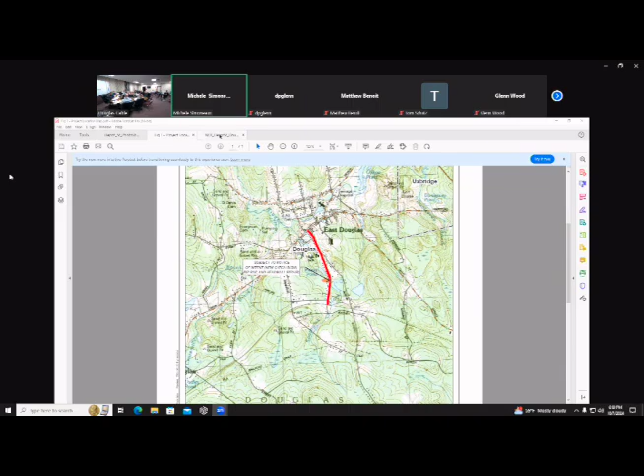Skipping over to some project plans - these are our notice of intent project plans that we presented to you. Without going into all the details of the exempt work, unless you have any specific questions, I'll dive into the subject of the notice of intent, which is the work here around 59 Depot Street. Let me zoom in a little bit for you. So here we have the roadway, and here is the river.

The various regulatory zones are here on the plan: the 50-foot and 100-foot buffer zones to the bank, the 100-foot riparian zone, and the 200-foot riverfront area from the mean annual high water line.

As we said, the majority of the work for the project will be in the roadway and therefore exempt. But there are a number of activities right around this location that we're going to be doing, which is the subject of this notice of intent.

Could you reference the plan sheet you're looking at? Yes, I'll give you the number here. C102. Thank you.

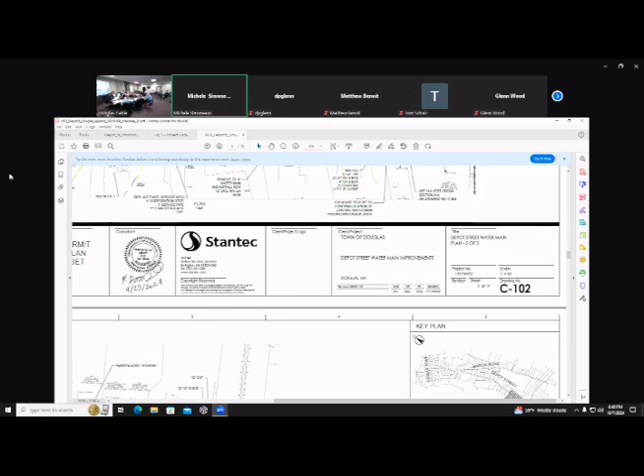Yes, so the majority of the work is right around here, around this stone wall, or headwall, excuse me, and then I want to show you some photos.

So here we are on Depot Street. The bulk of the work is going to be here at 59 Depot Street. This guardrail is right above the stone wall I described earlier. That's going to be replaced, and I'll show you why in a minute. When the project is done and this stone wall, the headwall, is replaced, we're going to be doing a guardrail up here and some stormwater management improvements, including a catch basin installed right in front of 59 Depot Street, with a 5x5 riprap area going down towards the river, which is in the riparian zone.

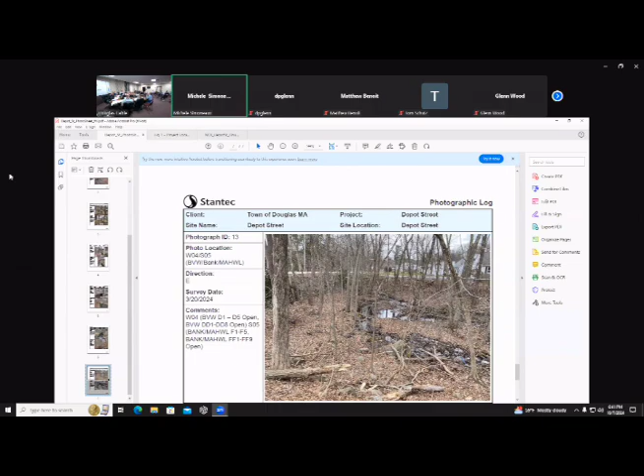Just to show you why: this stone wall, the headwall to the culvert, is in disrepair and needs to be repaired. So that's what's driving the work near the brook, coupled with the need for some stormwater management improvement.

I'll let my colleague Dave Glenn go into more detail about that later. But I just want to walk you through some of the plans for the stone wall here. Here's another shot of the road, the guardrail that will be replaced, and the top of the stone wall.

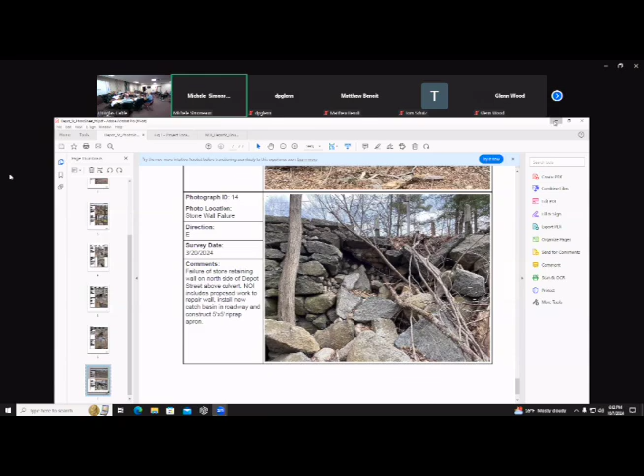Then I just want to page back to the plans here to show you some zoomed in details. I'm going to sheet, I believe this is 505.

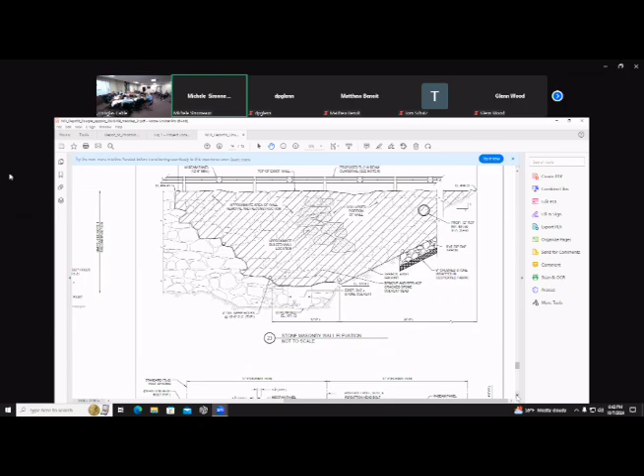So you said the entire wall is going to be replaced and not just repaired? No, it's going to be repaired, just the damaged section. The rest of the wall's in good shape. Okay, thank you. Who might you be, sir?

State your name and address. Bob and Eric. Bob and Eric, Economic Development. Thanks. Snuck in.

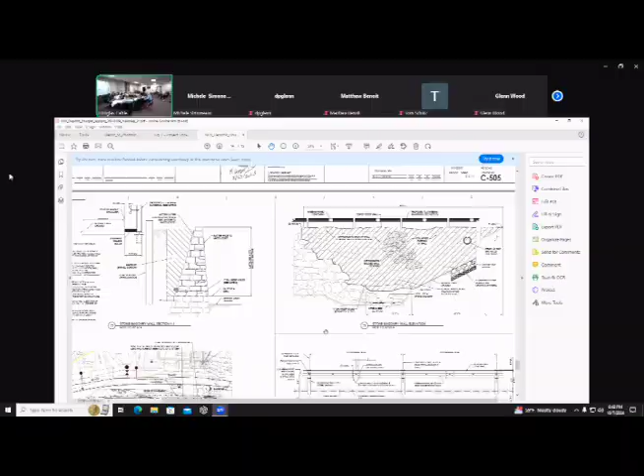So just, sorry, should I continue? I can't hear. Yes, continue, you can continue.

Okay, I appreciate that. So just to show a detail here of the stone masonry wall, what they're going to do is take the courses down to the top slab, repairing this wall because, as the picture showed, it's in disrepair, part of it is collapsed, so they'll repair it and reuse the existing blocks down below the wall towards the river.

As I mentioned, there will be some stormwater management improvements, which they'll go into in more detail, but there will be some weepholes placed along the wall to alleviate the stormwater.

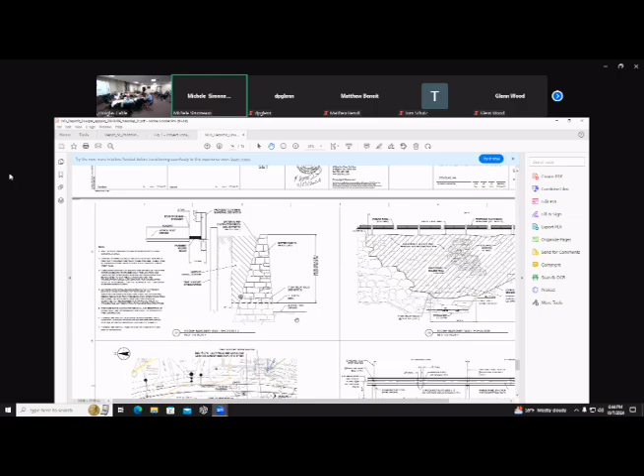Looking at this detail here, here's the stone wall itself. The idea is to support the project from the roadway, if at all possible. If that's not possible from the contractor's perspective, we built in a backup plan to potentially work with scaffolding across the river if need be, and to plan for that contingency.

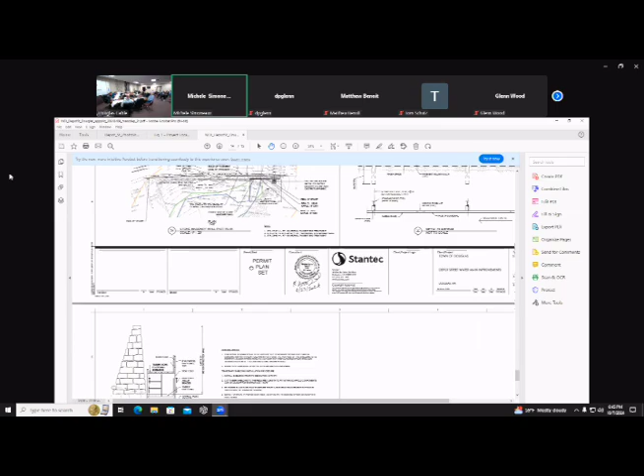We've got a detail of that here on this last page, a conceptual shielding work platform, in the event that the contractor has to get into the river and support the project from there. But otherwise, the hope is to do it from the roadway.

The trees that have to be cut, I mentioned in the beginning, and that's part of what's driving the riverfront area alteration. In order to do this work, there are a number of trees, mostly red maple, that have to come down. We have them detailed on the plans as to which tree, which species, with the DBHs, in order to make room for the contractor to do this work.

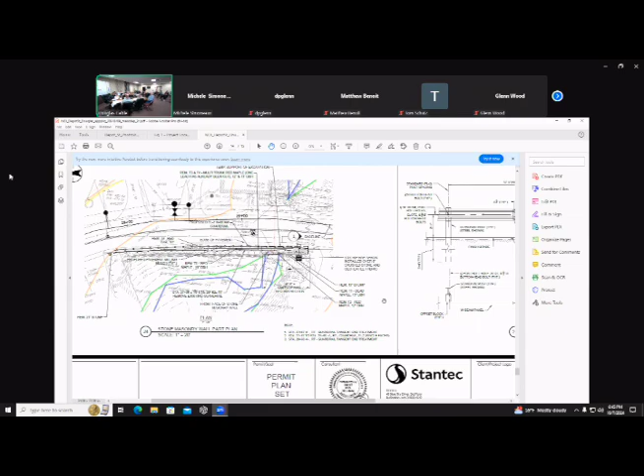And those are in the inner riparian zone. Are those trees below the retaining wall or on top? They are a combination. Most of them are on top of the retaining wall.

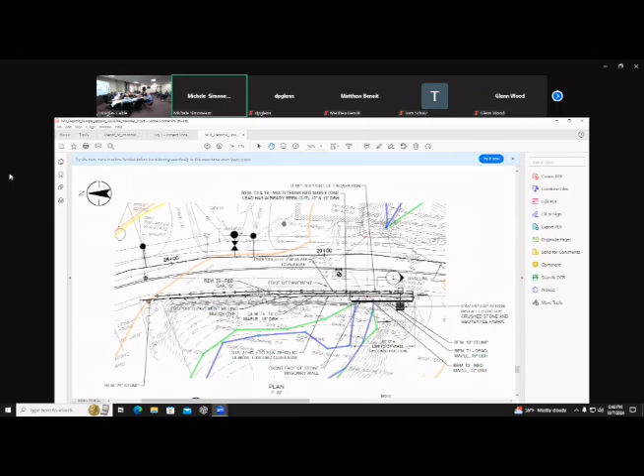Unless there are any other questions on that portion, I'll turn it over to Dave Glenn to describe the stormwater management improvements.

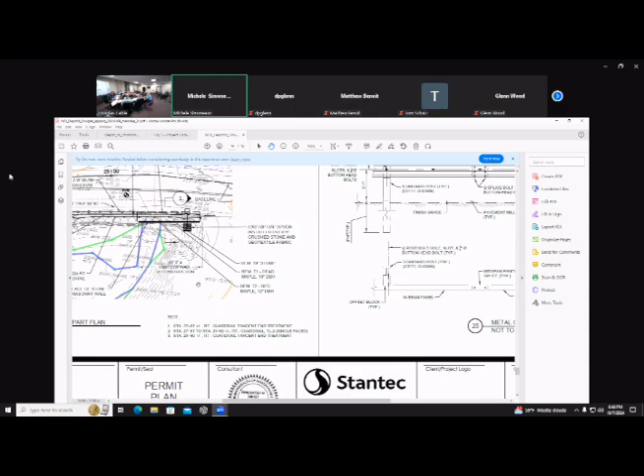Good evening, everyone. Dave Glenn from Stantec. I prepared the actual stormwater report for the project, and I'll go into a little detail on the stormwater improvements being proposed. Michelle, if you want to keep that graphic up, that's probably the best graphic to show the actual storm drainage improvements for the project.

As Michelle had said, the improvement is installing a deep sump hooded catch basin along the gutter line adjacent to 59 Depot Street and the stone retaining wall. The catch basin will provide some control of stormwater runoff in the area. Currently, the roadway in that area has no curb at all, and the water is sheet flowing off the curbless gutter, causing some erosion going towards the wetland system itself.

So the intent was to provide a catch basin in that area along with a berm to direct the water into the catch basin, and then outlet it through the pipe into a riprap apron at the toe of the slope. In addition to providing some water quality treatment, that will also control erosion, which is currently contributing at that area now, adjacent to house number 59.

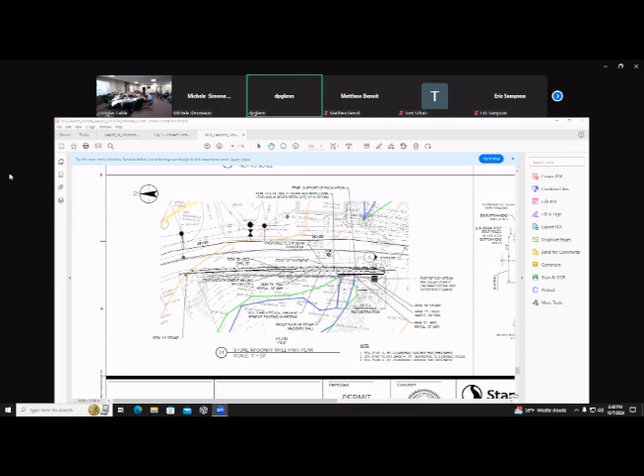Are there any drainage pipes that go into this new catch basin? No, it's just a single catch basin, because currently this whole area of roadway has no curb at all. We're looking to put in a bit of a berm along the back side of the catch basin to intercept flow from the roadway so it goes into the catch basin, as opposed to coming off the edge of pavement and causing erosion on the slope going down towards the wetland system. I think we had a picture of that—there's actually some erosion currently taking place in that area.

So it's just a single catch basin that's being provided.

Can you tell what caused the retaining wall failure? Was it water running over the top of the wall, or can you tell? I'm not a structural engineer, but from observations, I think the erosion has contributed to failure of the wall, in addition to having the tree located above the wall itself. I think the tree root system, as Michelle said, there's several trees along the top of that wall that have probably caused that to fail at this location. So I think it's a combination of things, but I would say the erosion potentially contributed to it, in addition to the existing trees along the top of the wall.

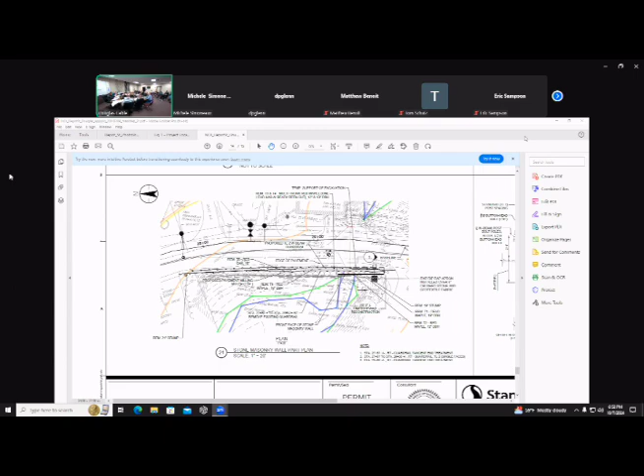And I just pulled a picture that we took when we were doing an inventory of the trees, so we could account for what had to come down since it's in the riverfront area. If you can see it okay, you can see at least a few of the trees that will have to come down. We're not seeing the pictures you're putting up. We're still looking at the plan on the screen. Did it pop up now? Nope, it's just the plan. Okay, interesting. The first time you did it, it did show up. All right, let me try again. Got a nice photo for you.

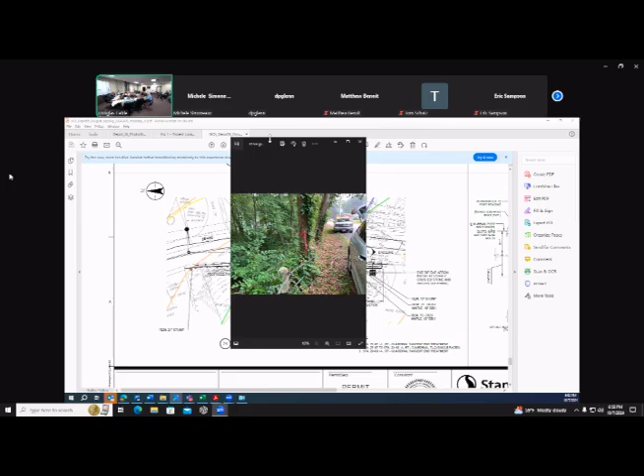While you're doing that, how far is the riprap apron from the water's edge or the wetland edge? I can't tell from this line what I'm looking at here. Is it a wetland or a bank? It is both. The green is a bordering vegetated wetland, just a little pocket of BVW. And this blue line represents a coincident inland bank and mean annual high water line, so it represents both. So it is in the inner riparian zone. It is not being proposed in the wetland, but it is a distance of approximately 50 feet.

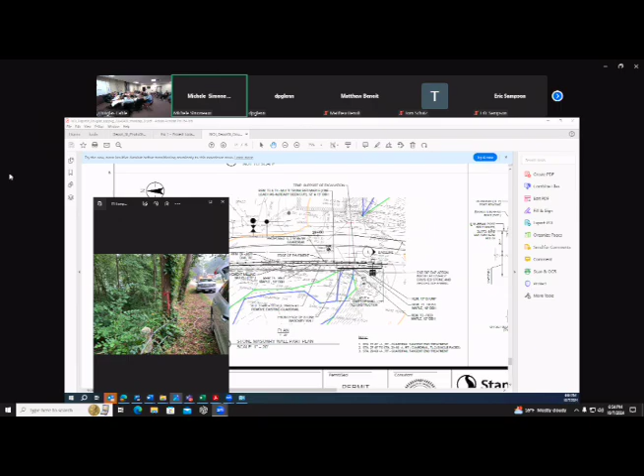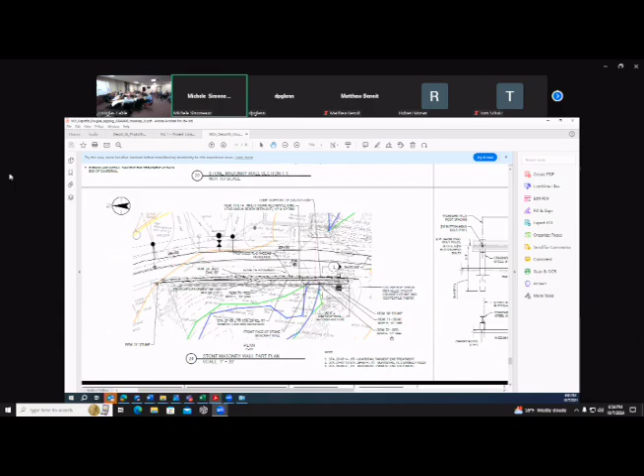You said 50 feet? Oh, sorry, no, the scale is different on this plan, apologies. I think it's more like 25 feet. 1 in 20, yeah. About 25 to 30 feet to the edge of the riprap associated with the stormwater improvements. Thank you. Yes. I can draw a line here. So to the mean annual high water line and bank would be about 25, 30 feet.

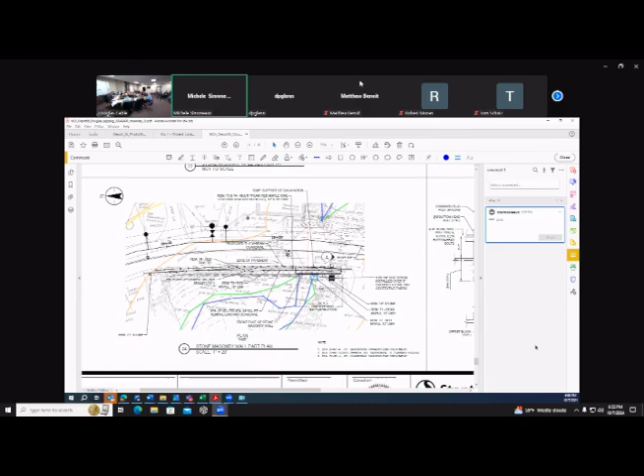That riprap is where all the stone is now? The stone from the wall? Oh, is it? Yeah, I went and measured it, it's about 75 to 80 square feet of stone that came down. So by taking that stone and putting it back into the wall, you'll kind of remediate back to the original wetland area. Mm-hmm. You know what I mean? Yep.

Is that everything? Oh, you got pictures to show us. Your pictures are up now. Yeah, we can see. So I was just confirming the trees that will need to come down, the red maples, and we do have measurements on those and an inventory of them included in the notice of intent. Okay. And the guardrail, did you tell us what type of guardrail it's going to be?

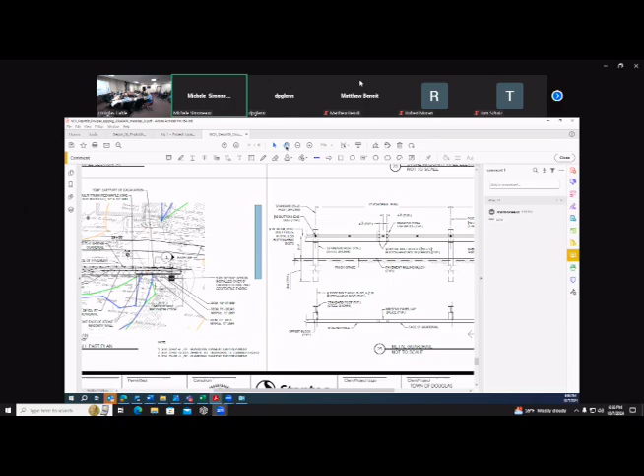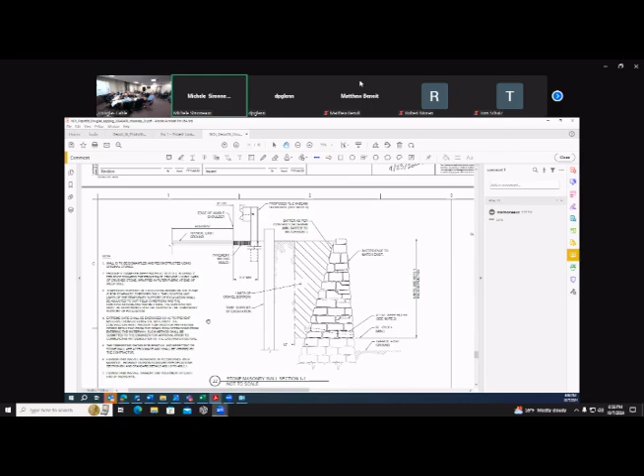Yes, let me show some detail. While I'm looking for the detail here, it's a modernized MassDOT approved type of guardrail, a TL-2 W-beam guardrail. It will be in accordance with MassDOT Highway Division standard specifications. Just a typical metal guardrail, replacing the concrete post and cable guardrail that's there now, which I just showed you.

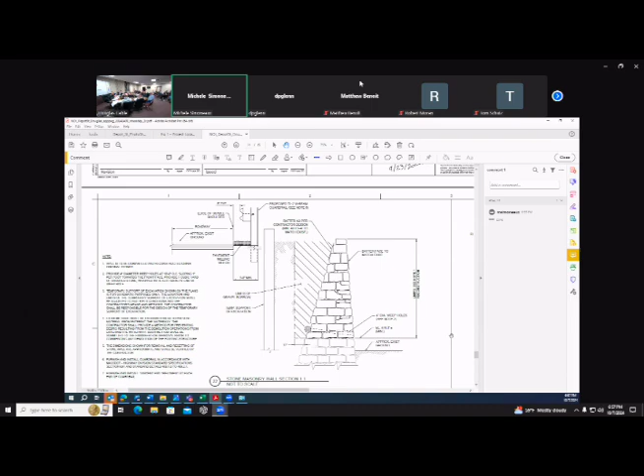And what is the color of the guardrail? Galvanized. Galvanized, great. Can it be brown? Because I've seen them brown in other projects. I'll defer to Bob on that one. I don't know, I haven't purchased brown guardrail, but I think I have seen them used. I'm almost positive. Yeah, I see them in parks, state parks. Right, exactly. It's more natural in that setting.

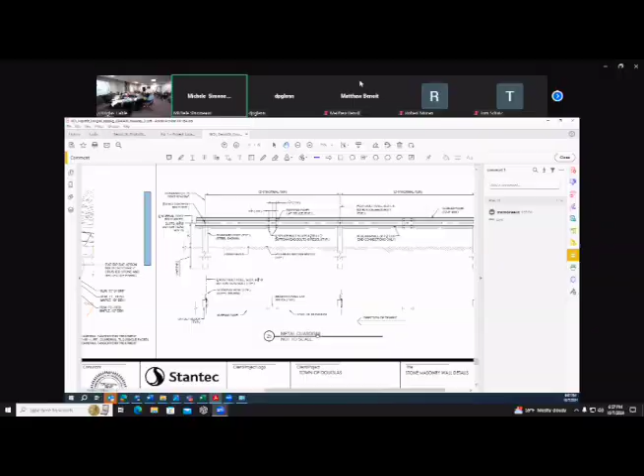Metal guardrail, found the detail finally. Okay. Brandon or Matt, do you have any thoughts on this proposal? Yeah, Mr. Chairman, I have a question. Okay.

This is a project within riverfront area, and they could not stay at least 100 feet away, but it's necessary for the work to happen within 100 feet. So this was filed as a riverfront area limited project, so I think it qualifies for that. As part of the disturbance, they're proposing to plant 12 mitigation trees off-site. So there's 6 trees to be felled, and there's really not room on site, and it's not even their property to begin with. So when you do redevelopment and you disturb the riverfront area, when you do off-site mitigation, the mitigation has to be a ratio of 2 to 1.

So they're proposing to replace 12 trees at the fire station at Cottage Street, which is next to what pond? Fire pond. Yeah, that's right. So I'd say that as long as the trees are within the buffer zone of the pond, and the narrative says it's going to be put in an area that's already like lawn, I think that's adequate mitigation for what's being done. Otherwise, I think the project meets performance standards for the other wetland resource areas.

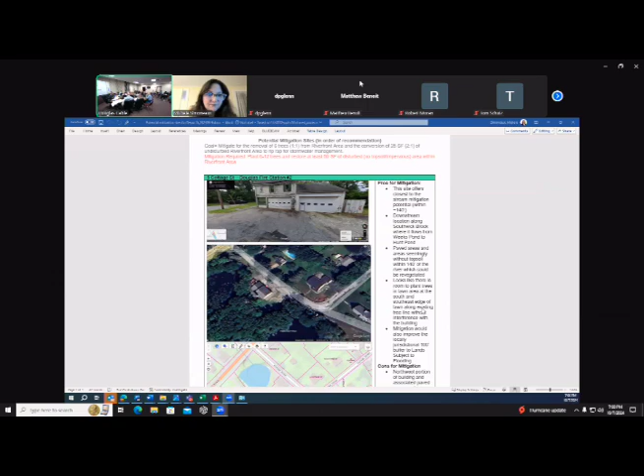And just as with North Street, my recommendations for special conditions, as I wait for Mr. Foran to catch up. I'm good. Okay. Is to include stormwater standard number 8, which is section 4.7 of the stormwater report as a condition, because it explains everything that needs to be explained, and also it references the stormwater pollution prevention plan, which is their guide for controlling erosion and sediment on site. And also to include section 4.8 of the stormwater report, which is stormwater standard number 9, operation and maintenance plan, which states how the stormwater BMPs will be taken care of long-term, and to make that an in perpetuity condition.

Thank you, Brandon. Is your thought to go to the left of the old fire station, or the right, or both? Do you really have a thought as to where the trees will really go? I don't know that we picked the actual spot yet, but we just know there's area there. Right. The narrative relies a lot on me, that the conservation agent will have some authority to pick the species and the location of where they go. Okay, so if you want to put that in as a condition? Yeah, why not? If you don't, then you have a little less control. Right.

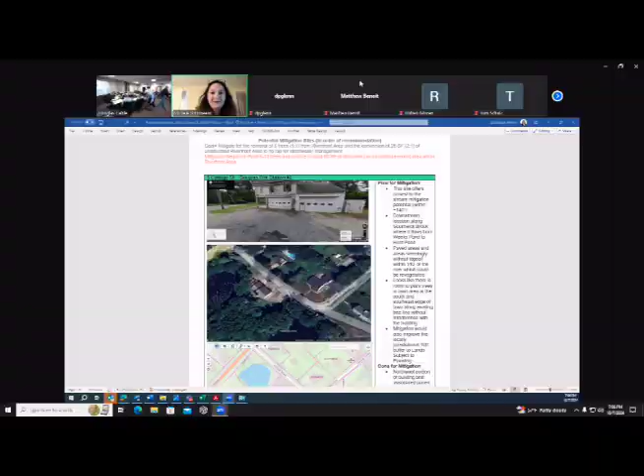All right, at this time, I would like to open the public hearing for... What day was it continued to? The 21st. Thank you. For Kyle and Crystal Genesee, 122 Walnut Street, single-family home, map 274, lot 7.2. I'm going to just read it. Haven't done that in a while. Okay.

The Town of Douglas Conservation Commission, 29 Depot Street, Douglas, Mass. 01516, pursuant to Mass General Laws, Chapter 131, Section 40 of the Massachusetts Wetlands Protection Act, the Town of Douglas Conservation Commission will hold a public hearing on October 7th at 7 p.m. for a notice of intent filed by Kyle and Crystal Genesee, located at 122 Walnut Street, for work to be done pursuant to the Town of Douglas Wetland Bylaw and the Wetland Protection Act, MGL 131, Section 40. The proposed work involves the replacement of an existing culvert, widening of an existing driveway, grading, and utilities.

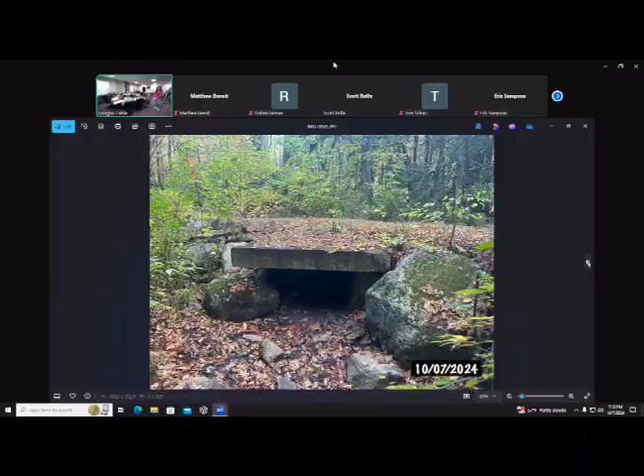Brandon, have you had a look at this? Yeah. I got a slideshow that I've been putting up while you're talking. Oh, and I haven't even noticed, sorry. That's okay. Can you run through it again? Yeah, sure, I can stop it. Oh, hold on. Okay, here's the existing

dirt cart path leading to the back of the property where the house will eventually be constructed. And when I review these kinds of projects, when it's just a driveway or just a road, I always look at, well, what's the end point? Are you even going to be able to do what you want to do beyond the crossing, the whole purpose of the crossing? Or is it just a waste of everybody's time and unnecessary destruction of the environment?

But the area where I'm guessing a house is going to be built, I checked it out, and it looks like there's plenty of upland that they could build it outside of jurisdiction. So I just want to point that out first. Okay, so here I am walking up the path, and now I'm at the crossing, which is right here. Okay.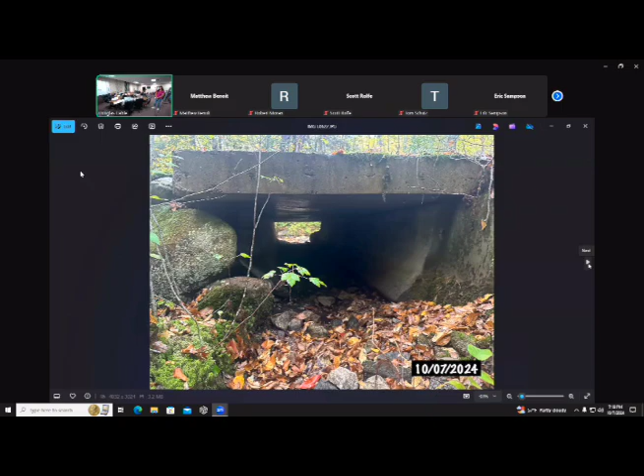And even though it's dead, it actually has as much, if not more, value than the live trees because it's great habitat for insects. Out in the middle of the woods, not a problem as opposed to right next to your house, because it provides a food source for the animals, and especially the birds, and it provides nesting habitat eventually for boring birds that would bore into it, squirrels and things like that.

So my request would be to try and save these, what I think are high-value trees, to try to work around the drip line of the root system. You don't have to work around the drip line of the dead one, because it doesn't really matter. But just attempt to preserve these 3 trees. If they live, great. If they die, then they just become a snag tree with wildlife habitat value, so no big loss. So that's what I think about it.

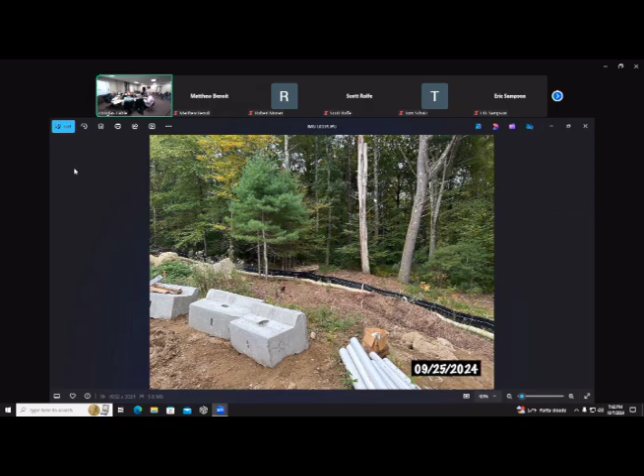Correct. So what's the proposal for those trees in terms of removal? Removing just the trees, cutting them, leaving the stumps? Yes, like for example, Mr. Chairman, in this picture, this one right here is one of them.

This was meant to highlight some of the trees, like this one right here. I think at least one, if not both, of these white pines, because the garage is being proposed right here. Here's a good one - this one shows some dead ash trees here and here. So these are the kinds of trees that are proposed to be taken down, and I don't have any issue with that.

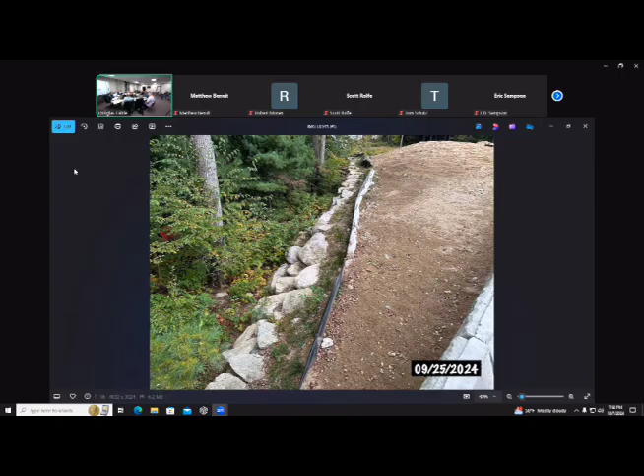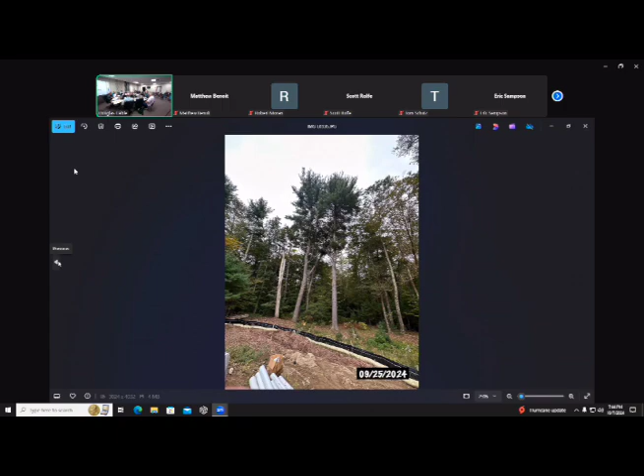I mean, those you said were pines? I don't see pines on here. The ash trees. Okay, go back to the picture that showed - yeah, so ash right here, yep, those are the ash. Ash right here. There's a picture before that where you... sure, those. Yeah, these two proposed to be taken down? No, just the dead one. It's the other one in the front that is a big white pine that's split. It grew like this - I don't know if I got a picture of that one.

Okey-doke. Yeah, but anyway, all the trees that I saw were either in the limit of disturbance already or very close to it and within striking distance of a structure, so we get a letter from a certified arborist - so what are you going to do? Exactly, what are you going to do? Okay. So that's the easy part.

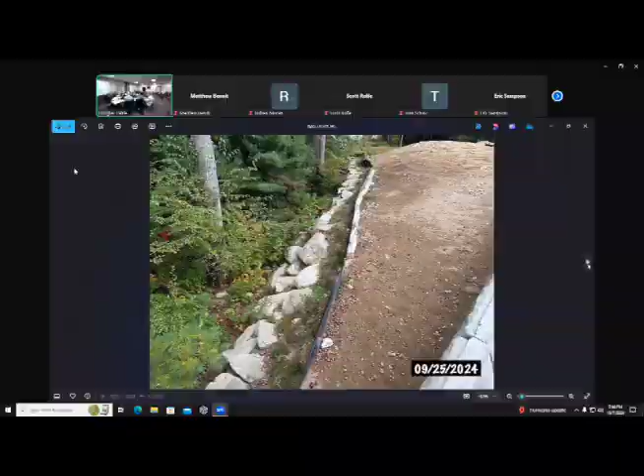And then the harder part - do you have any questions, Kate? Jim? Thank you, no, okay, thanks. The harder part is the boulder retaining wall that you brought up last time, Mr. Chairman, which is a picture of right here.

Now, this is loosely put together, kind of on the job, put together by the previous contractor, previous owner. That was not on the approved site plans from the 2021 order of conditions. It just appeared. The brick houses had nothing to do with that, but I couldn't ignore it. So the question is, let me step back.

As part of this exercise, I decided to do a georeferencing exercise with GIS software. And what I did is - come on, be helpful here. Here we go. So I'm going to go through this with you.

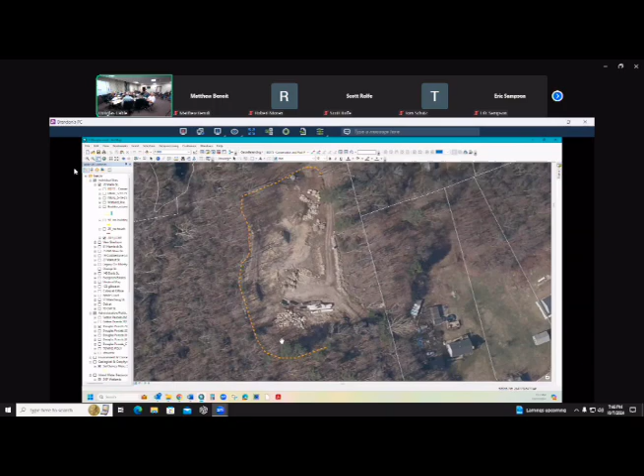There's all the boulders there. Well, it's all piled up. Well, on this side, you come in from here, right? All this is gone right over here now. All these boulders, they might still be there, but they're well within the limit of work. What wasn't there before is this row right here. Okay? All right, so...

Excuse how slow this program is, it's big and clunky. So what I did is I took the site plans and overlaid them using the property lines and wetland flags as control points. So this is the site plan from 2021.

And the area that we're concerned about is right over here. This is where that boulder retaining wall is now. And then what I did is I then geo-referenced the 2024 plan to go along with it. Give it a second. Here we go. So if you notice, the wetland lines, they line up perfectly.

All the flags, they line up perfectly. So I'd say that they're one for one as far as comparison. As far as the construction of everything goes, it's very close, if not right on, for the things that were proposed before, lining up with what's there now. Things that have been added include the sports court, and then we have this boulder retaining wall here.

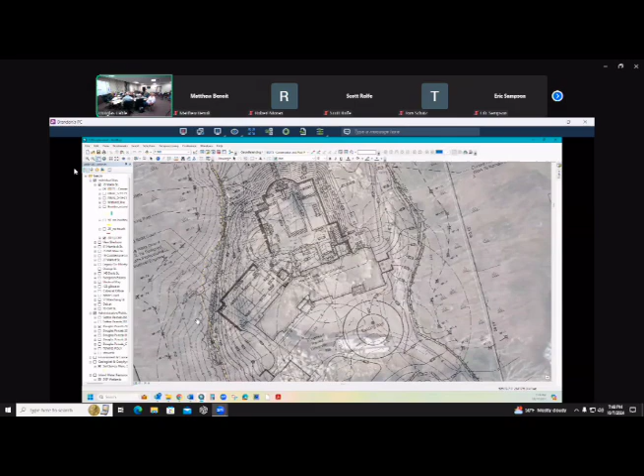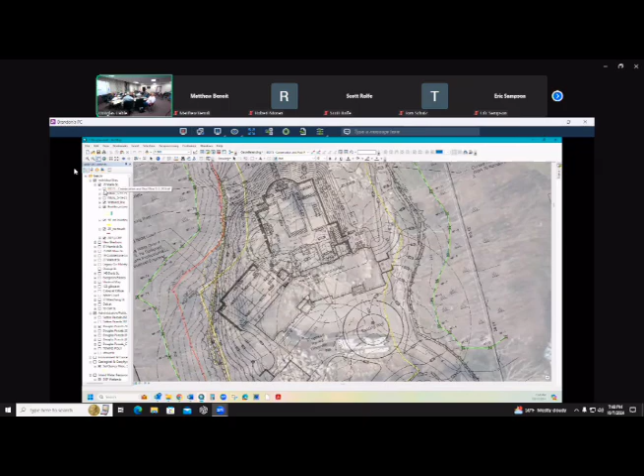Let's put up the wetland line in green for good measure, and then let's just take away the site plan. Then it's a little less busy, you can see a little bit better what's going on and where. So this thing right here is the boulder retaining wall.

Wetland line, 25-foot no-touch here in red, 50-foot no-building zone here in yellow. And the approved limit of work, which hasn't changed from the '21 to '24 plan, is here in this dashed orange.

What I found is that down here in the southern portion, the boulder retaining wall slightly incurs into the 25-foot no-touch zone. But in this area the wall pretty much fades into nothing. The part that's much more well-established is this section right here, which according to my conversations with Ken Frazier is over 10 feet high, with footings. We'll get into that, let's continue with this exercise.

This orange line is what was approved for disturbance in 2021, so there was grading proposed right down into here before. Let's bring up the 2021 plan—you can see the grading coming right into here. But as it was actually built, the boulder retaining wall is slightly outside of that. I think that's worthy of note, that they were able to keep the work a little further away than what was originally proposed in 2021.

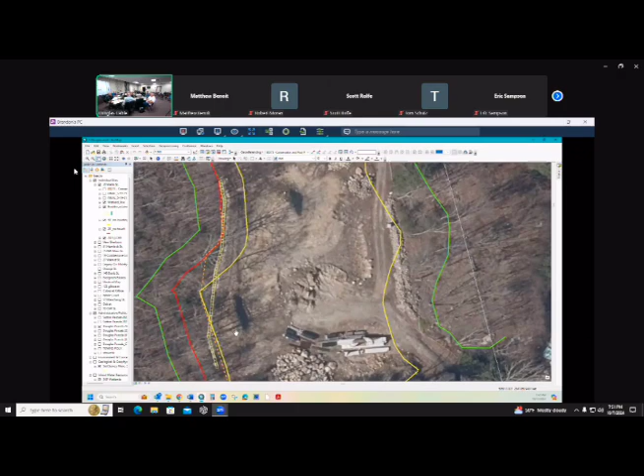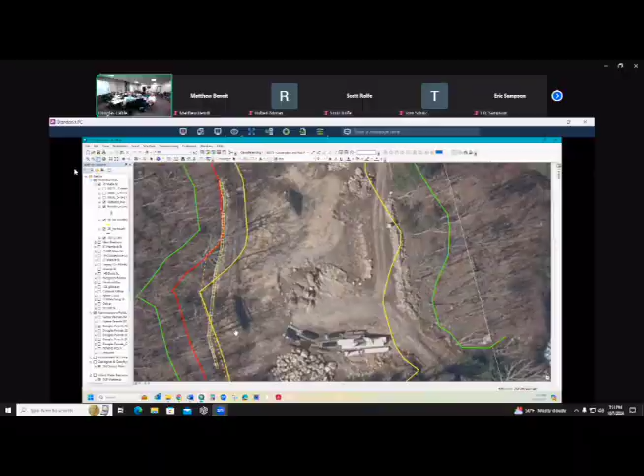Now the big ticket item: does this wall qualify as a building under the bylaw regulations? I'll read the definition for the record one more time. Building means anything requiring a building permit or other structure, including but not limited to retention or detention ponds, culverts, or wing walls. I wouldn't call this a wing wall, but it is a wall, so I leave it to you to decide whether this qualifies as a building.

Read that again, please. Building means anything requiring a building permit or other structure, including but not limited to retention or detention ponds, culverts, or wing walls. With that, I want to read an email from Ken Frazier, the building commissioner here in Douglas, because I asked him to go look at it—Ken, is this a structure that would require a building permit? Because that's part of the definition for conservation's purposes.

He wrote an email, let me bring that up for sharing. It was written to Tony Brookhouse, and I was cc'd, as well as Mark Allen.

Hi Tony, this email is in regards to the retaining walls that have been constructed at 35 Wallace Street that require an engineered set of stamped drawings, permits, and inspections due to the fact that the walls exceed 10 feet in height, and it also appears to have been constructed on an unstable base of stacked stones at the highest point. Please be in touch with my office to let me know the course of action you'll be taking to remedy this situation. So that's part of what I think the commission should give the applicant an opportunity to speak about and defend themselves tonight.

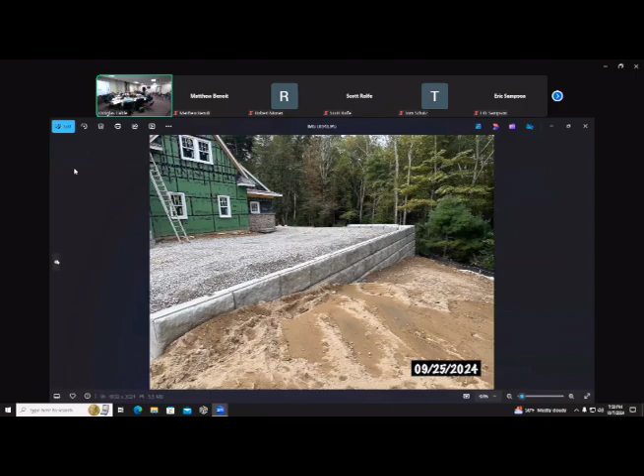I'm more talking about, that's such a small area there, I'm more talking about the area to the left of the pool where the wall is 25 feet from the wetland edge. All right, well that's more in this area, right down here. Let's see, do I take another one? No, then I turn direction and look the other way. Okay, yeah, I'm not understanding why I'm seeing a grading plan that doesn't show a 2-to-1 slope. I see a 2-to-1 slope on the backside of the pool area going towards the trenches, but to the wall, it doesn't look like a 2-to-1 slope to me.

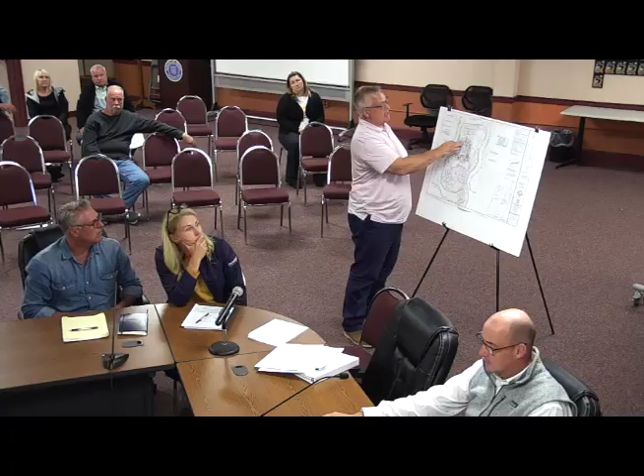Unless that's what's being created now. The original plan back in 2020 had a 2-to-1 slope going from the 25-foot up to the back of the pool. This plan that you have in front of you incorporated keeping the wall in place and tying the 2-to-1 slope that goes around the back of the pool into that stone, into that boulder wall.

So I think I know what Mark's talking about now. The portion that's sort of closest to the 25-foot no disturb, that can be feathered back. And as we go closer to the lake, it actually drops down in height. So it's going to be actually easier to pull those stones back and make more of a slope in that location. Probably more like a 3 or 4-to-1 slope in that location.

What I think Brandon and Pete are talking about is more of that triangle in between the sport court wall and the boulder wall to do sort of tiered 3.5-foot walls, kind of like a terrace. Yes. Yeah. And to speak to the chairman's concern, there's going to be fence around that sport court for basketballs and stuff like that, so you're not going to get there unless you really, really tried to get there.

But I think we're kind of talking the same language. If we can pull this grade back by keeping the wall less than 4 feet in height for the vast majority of it, and then where we can't keep it less than 4 feet in height, that's where we start the terrace as we get closer to the sports court. And that terrace planting is something that Pete and I can put together for you. Yeah. Yep. Terrace planting. Yeah, that's my primary concern, is that area between the 25 and the 50, and trying to keep that as natural as we can.

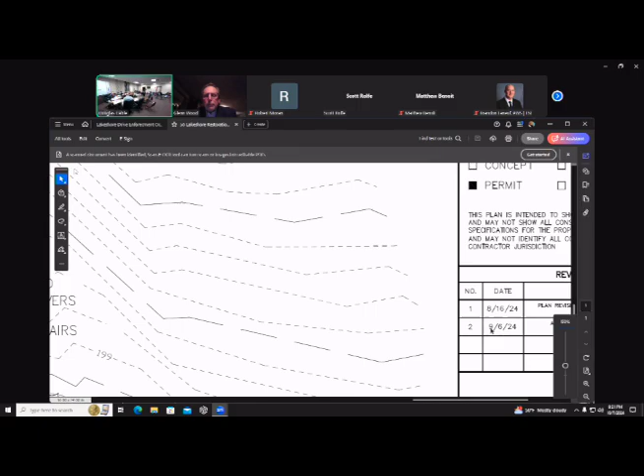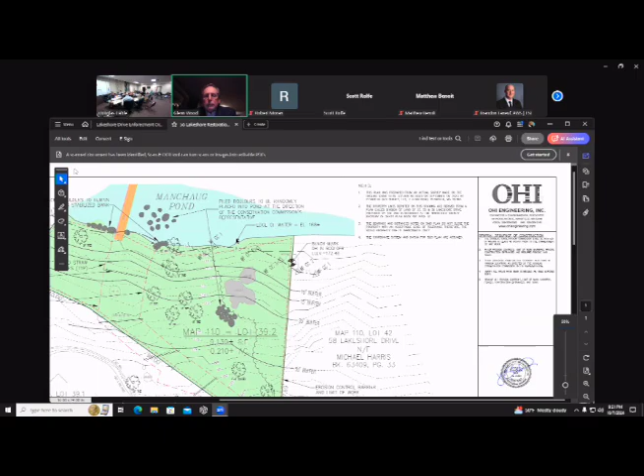So just to clarify, this plan addresses the enforcement order, which is the removal of the boulders and the stabilization of the bank, but it does not have anything to do with the entrance into the site and the erosion. Well, it does show the entrance right here, and there has been in recent weeks an erosion event that has scoured out this area once again. It's like it's constant.

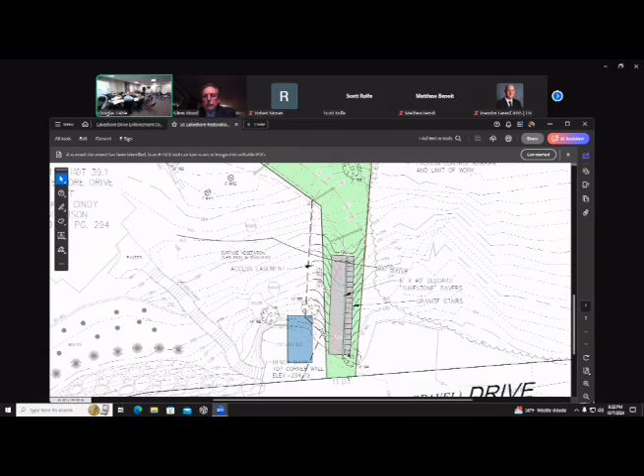Right. But I don't have an issue myself with what they're proposing to do here. But as the commission has talked about, why do this work right in here when Lakeshore Drive is still a concern with runoff? And that's part B of the conversation. So first things first, I would recommend trying to come to some kind of conclusion on the amended enforcement order before you move on. Yes, I just wanted to clarify that we were dealing only with the boulders and the stream bank and not what else is on this plan.

Okay. Mr. Chair, Glenn Wood again. The only other thing, as I presented 2 weeks ago, is that as part of the narrative, and I believe as suggested on the plan, we are proposing to bring in a small amount of material to level out the area that has, as Brandon's pointed out, recently eroded again, so that it's level enough for appropriate access with the equipment that's coming in to move the rocks back into the pond.

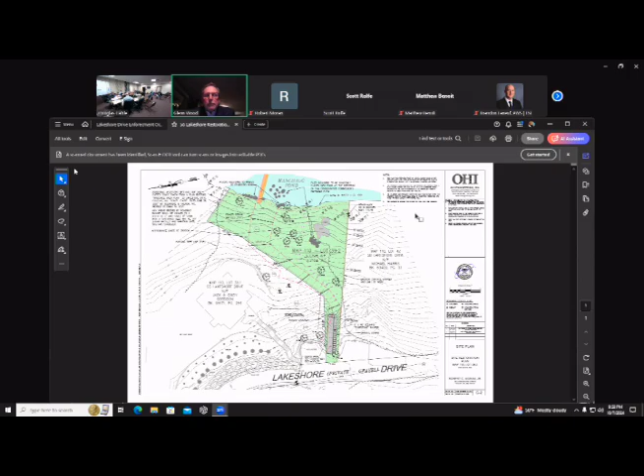You'll need to be more specific as to what you mean by leveling out and bringing in material, because that sets up red flags for me when it's October 7th. It's spelled out in our narrative when this was submitted with the attached plan in August, so you have that. And it's going to be incorporated into the amended OA.

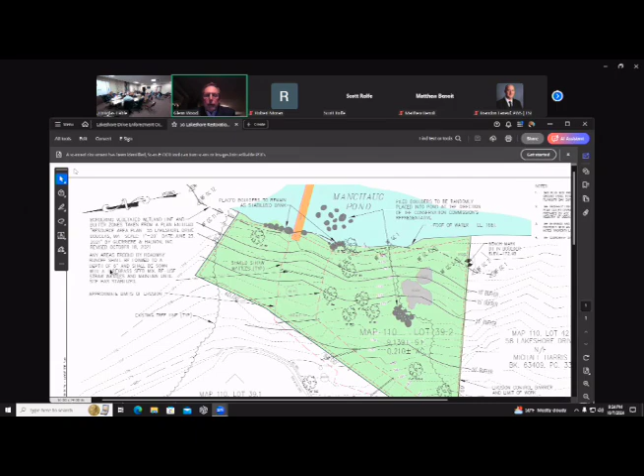The proposal, or the suggestion, is that the OHI report from August and this plan are going to be attached, physically attached, to the amended OA. Right. So there's no confusion. Any areas eroded by roadway runoff shall be loamed to a depth of 6 inches and shall be sown with turf grass seed mix. Reuse straw wattle to maintain until site is stabilized.

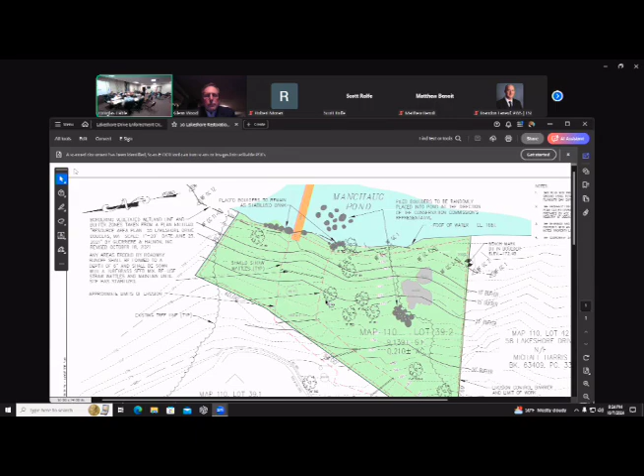Yeah, well, I don't want to do that this late in the season. Okay. It's too late to start putting loose material down and seeding it when we have all winter where we're going to have water and snow and rain, and it's all going to be running down the hill. Well, I don't see an issue with that, Mr. Chairman. That can wait until the springtime, and that can be part of our pre-construction meeting.

Yep. But the replacement of the boulders does have to take place over the late fall and the winter when the drawdowns happen. I agree completely with that. So I think that's all, unless Attorney Wood has an objection. No, not at all. I can add, Mr. Chairman, there's been significant runoff on the downslope here, so in order to get equipment in they have to bring in some material to get equipment down to do this.

Yeah. I'm not opposed to making improvements to be able to access, as long as those areas are protected with erosion control barriers or other means. All right. So, Mr. Chairman, up on the screen, you'll see a picture from today. Wow. Yeah, you see there's a little bit of gully right through the middle. They had repaired this, I want to say, a couple months ago. I think so, yeah. And it looked great, and now look what it looks like again already. Right, and so every time it moves.

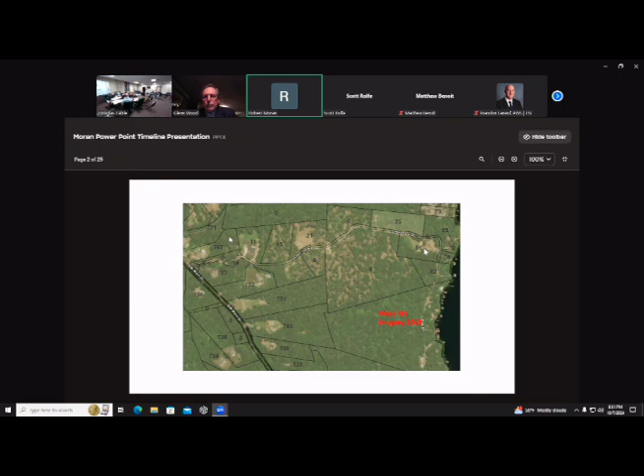No, yeah. That was Robert Moran speaking, sorry. Address, Mr. Moran, just for the record. Next slide, please. Mr. Moran, what's your address for the record? 56 Lakeshore Drive, Douglas. I apologize, I'm in an emergency room right now, so. Oh, sorry about that. I'm going to remain on silent. Yep. Thank you.

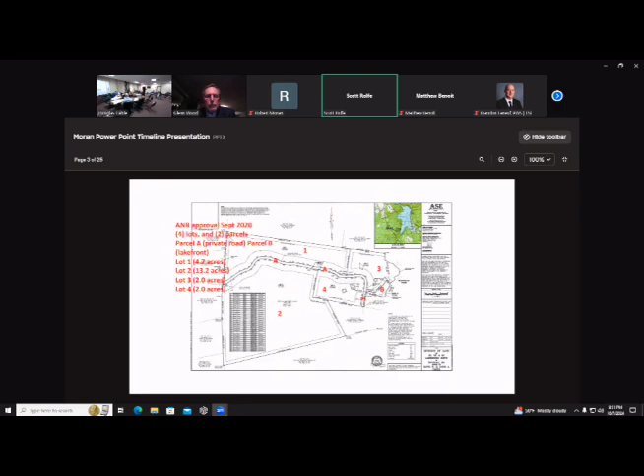In November 22, Guerriere and Halnon prepared this plan here, where they took the same 4 lots that were divided by Andrews Survey, and they created a total of 8 lots here, and with the addition of a piece of property over where lot A is, that bump out there was not part of the original development, but with the addition of that and then some of the existing strip that's down below that, the parcel was cut up into the 9 lots total.

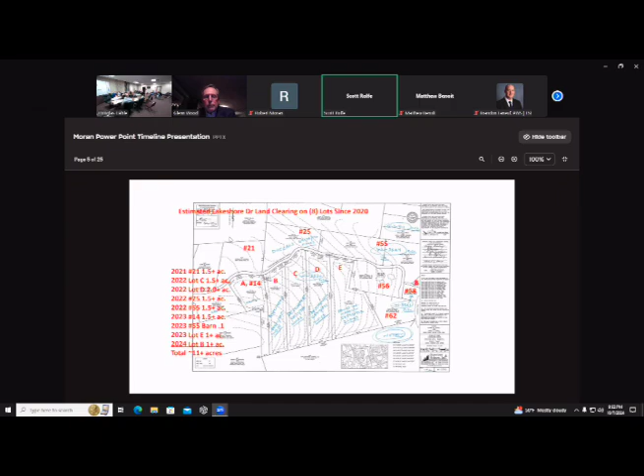This slide here is just a rough estimate of the amount of clearing that has been done per each lot since 2020, a total of about 11 acres. Next slide. All right, taken in September 2020, this picture shows the entry to the Moran waterfront lot, looking down from Lakeshore Drive. The 100-foot buffer line is shown there approximately to the left. The line diagonally cutting across the middle of the picture separates Mr. Goodison's property to the left and Mr. Moran's property, parcel B, to the right. Next slide.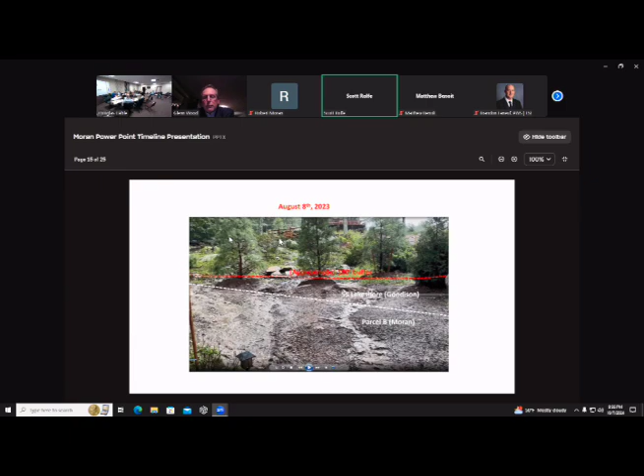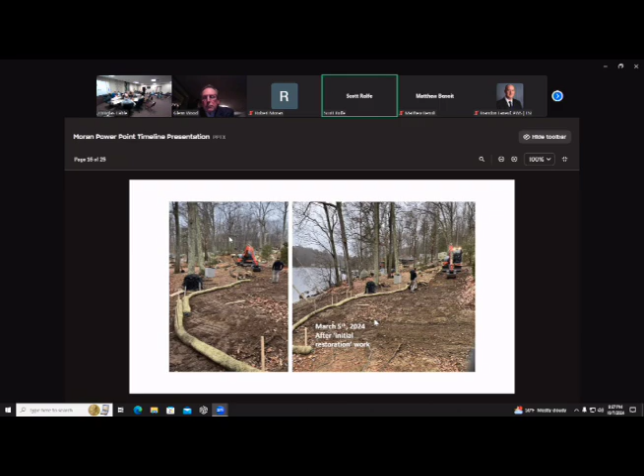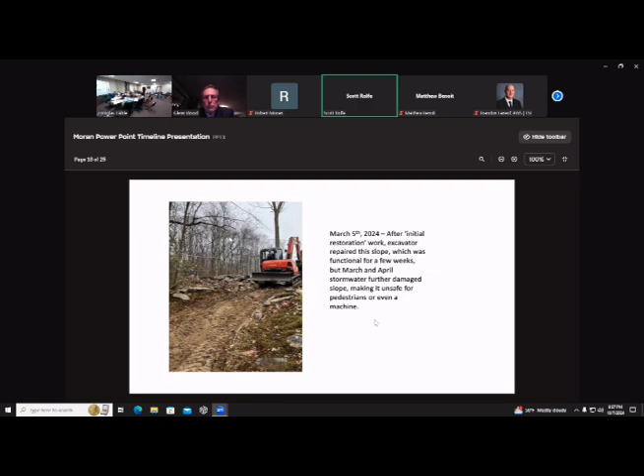All right, on March 5th, this shows the restorative work that was done to correct the erosion within the access strip to the pond, to the waterfront lot. This is the same restoration looking downslope, again toward the pond. That's Mr. Goodison's house over to the left. Again, same day the restoration work was done. This picture here, Mr. Goodison has restored and raised the stone parking pad, which you see more apparent in the next picture.

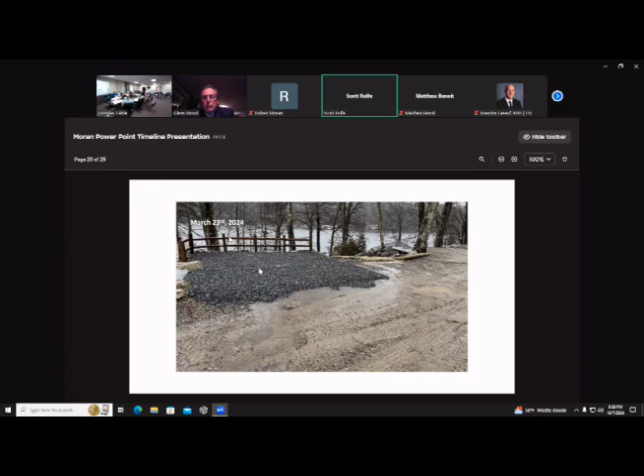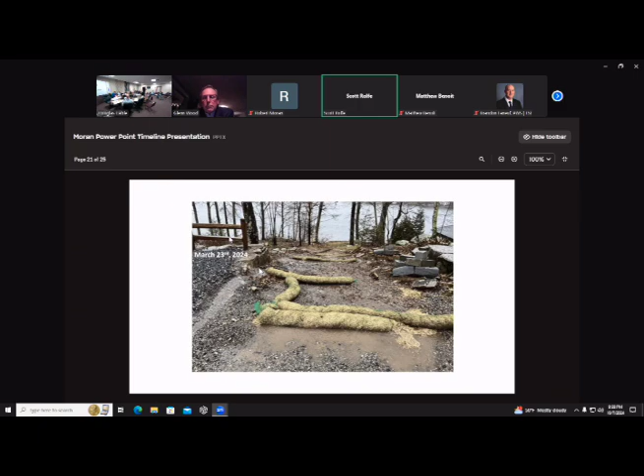Here it is with the rain event. Now, because that was filled in, elevated, what that has done is forced the storm water to continue to flow, passing the raised bed to the Moran lot. So now all the water runs down the access way to Moran's waterfront lot. And this shows the additional damage to the lot because of the bypassed flow. This is a condition of the eroded slope. This is approximately 3 weeks after it was repaired.

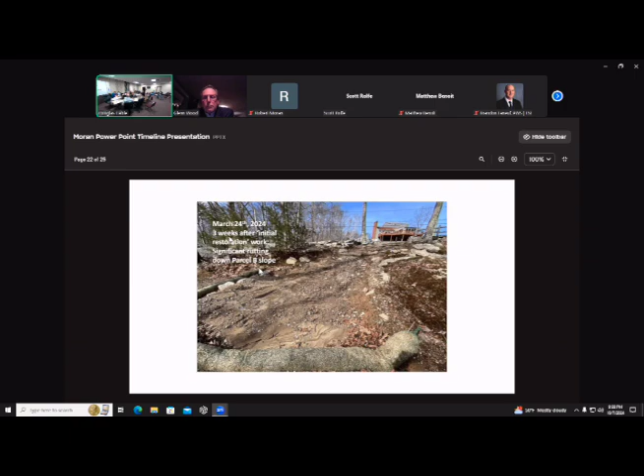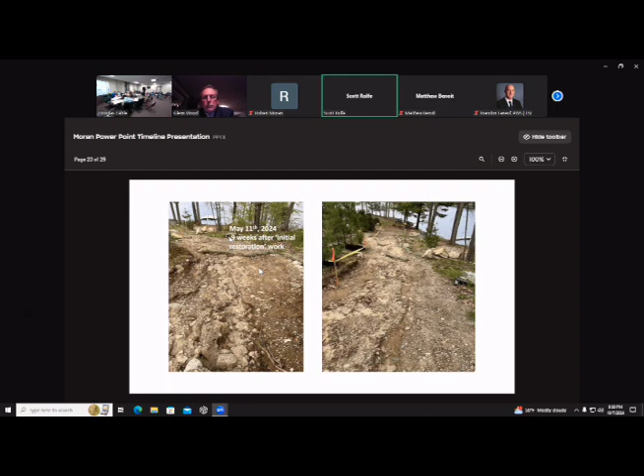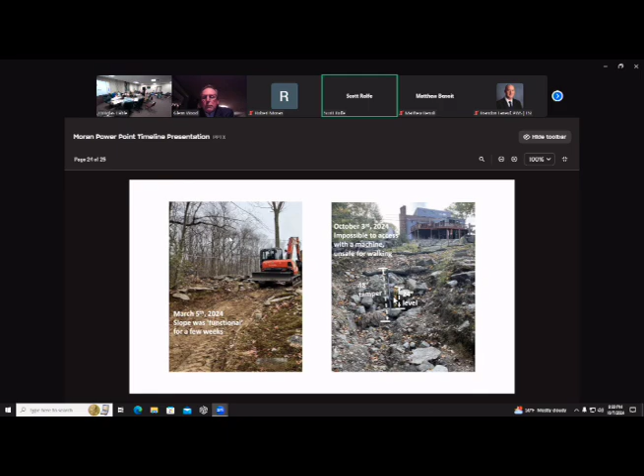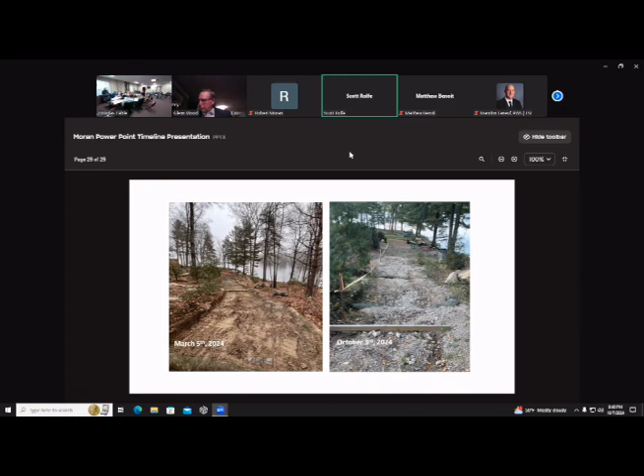And the last slide coming up here, this is a comparison of the lower half of the entry drive to the waterfront lot, both at the time it was restored and as it was on October 3rd of this year. So this is why I had told Mr. Moran he should hold off on doing any work to the entry of the property, because it's quite obvious that whatever he does here is going to continue to erode until such time that the flow coming down the street is addressed. That kind of concludes this PowerPoint.

Thanks, Scott. And so just a few points again, Glenn Wood. I also shared with Brandon today a little bit of research that our office did in terms of possible DEP jurisdiction, as to whether the upgradient sites' residential development, which is well over 10 acres right now, because these properties are completely denuded and open, triggers a stormwater pollution prevention plan, a SWPPP, and a water quality cert under 401. It's our view that there are triggers here, and we're hoping that the commission, in conjunction with our client, or maybe even with the ConCom taking the lead, reaches out to the DEP, to the Central Regional Office's Wetland Section Chief and their circuit rider.

I do a lot of SWPPP enforcement for clients of mine. In fact, I've done a number of them with OHI, where we have clients that don't have SWPPPs and needed them. And DEP takes these extremely seriously. And given that it's clear that the water body has been impacted and will definitively continue to be impacted as we get into more major rain events, whether it's on our property or frankly on the Goodison property, both of those properties are being adversely affected because we're the downstream recipients of a massive amount of uncontrolled stormwater from the residential developments and the clearing of land with little to no stormwater controls. And so we think that this is a serious DEP enforcement situation.

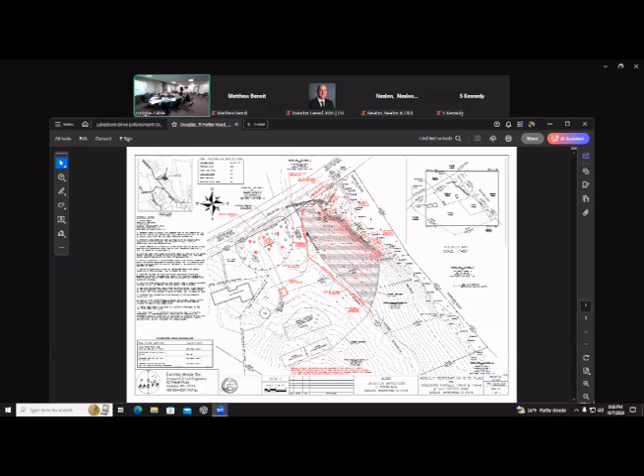So this could be your road next. Could be. Yeah. Water coming down your road and into the pond, isn't it? And the river. Yeah, from the previous number.

Oh, there it is. Sorry. So obviously we just got this today, I didn't look at it. Are there any discrepancies that we should be concerned about or anything? It didn't sound like it from the meeting last week. No, sir. Correct.

Still need Glenn's year-end assessment for this year, and then again in the fall of 2025. But I think that for now, the actual construction part of it was very good. Here's the as-built, I think that part can be written off. Okay.

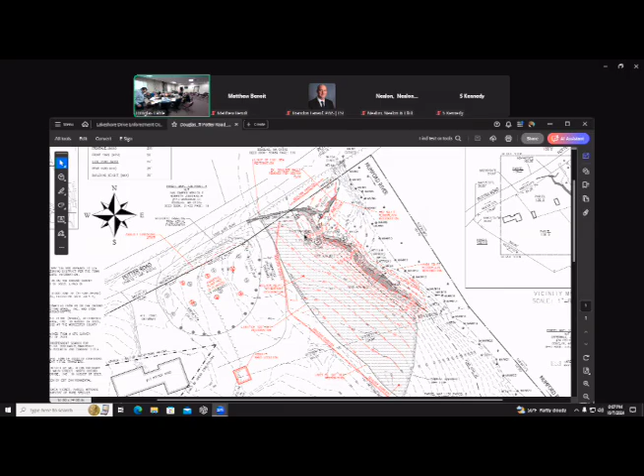I'm in agreement completely, I thought it looked great. I thought the work was excellent, and appreciate moving forward with doing all that. So...

Someone want to make a motion to approve the partial certificate of compliance for DEP number 143-1085, Jessica Bankston? Sure, so moved. Second. Okay, motion's been made and seconded to approve a partial certificate of compliance with how long?

Is it 2 years? Yeah, there's 2 years of inspection. Which is the fall of '24 and the fall of '25. Okay, with 2 years of inspections, fall of '24 and fall of '25.

All those in favor? Jim Farr, aye. Kate Thompson, aye. Mike Greco, aye. Mark Bonjam, aye.

Thank you, waited all that time for that. Yep, we should have moved her up. It's okay, thanks, have a good night. You're welcome. I'll be in touch with the growth plan. I've been in contact with Glenn about it, so. Thank you. Thank you.

2 more. Look at that, Kate, you got to vote tonight. Oh, yeah. Yeah, but isn't she standing? No? Really? That's it?